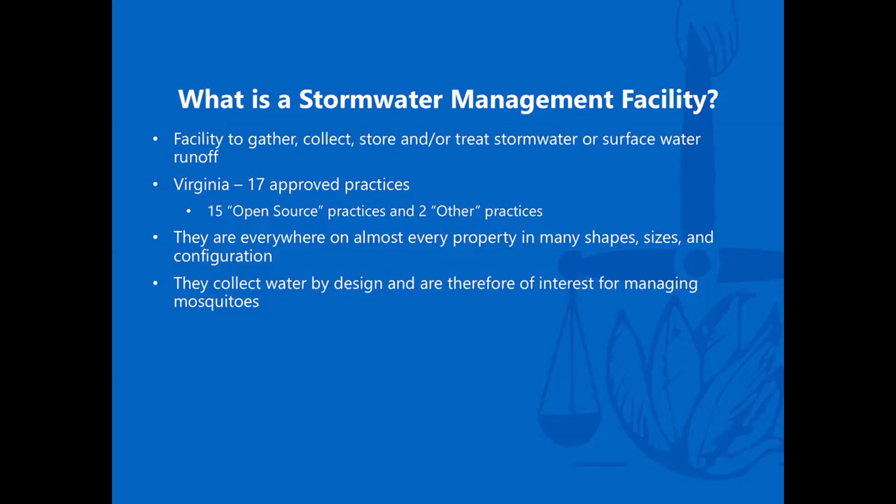By design, they're of concern for mosquito control, because their sole purpose is to, at a minimum, collect rainwater. Now, what happens to that rainwater after it's collected varies greatly on the facility and the practices of the individual jurisdiction that's managing those. But just in the sheer nature of what it's there to do, it's of concern to us.

Quick anatomy of it. This I just ripped right out of the Virginia Stormwater Manual. The top picture there would be a bird's eye view down on what you would consider a typical stormwater facility. Starting at the top, you would have the area where the water flows in. And then usually you'll have either a gabion basket or some sort of riprap to slow the water down or disrupt flow to some degree.

And then as it makes its way through the pond floor, it's spreading out, potentially forming into a pool of water, or there could be plantings in there. There could be designed wetlands. There's a number of different things. And then every facility will have a dam breast or an embankment through which a control structure and pipe control the flow of water that comes out.

And you can see that the bottom picture is sort of a side view of it. And it's that same sort of tiered and stepped thing. It's important to note that basically anywhere you see a flat surface, or structure such as riprap, or a designed pool, these are all places that, number one, water will naturally collect, and number two, you will have a natural point of failure, which is going to be a theme of this as we continue.

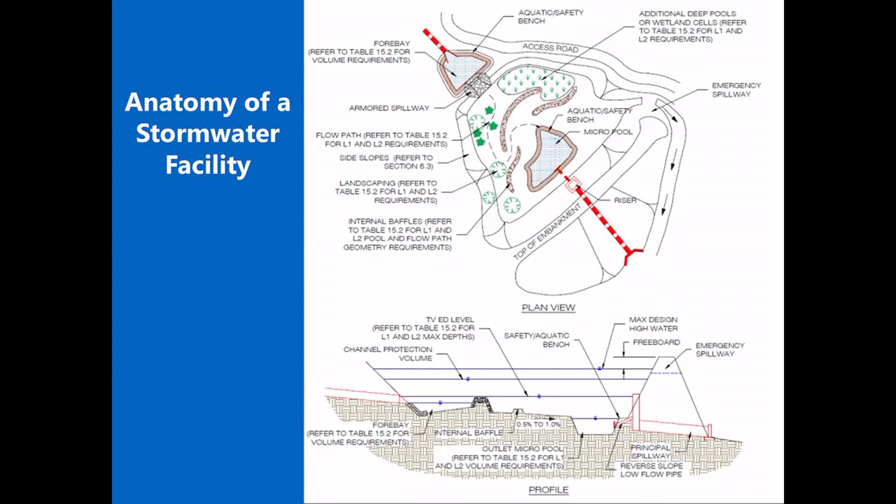And obviously they'll have fountains. Most of them will support fish populations. A lot of them are actually repurposed for recreational uses with HOAs. Generally, these are not issues for mosquito control, because we have a natural aquatic ecosystem that eventually takes over. And the mosquitoes tend to not want to use them, or they don't have the survivability in there because the water is not as transient.

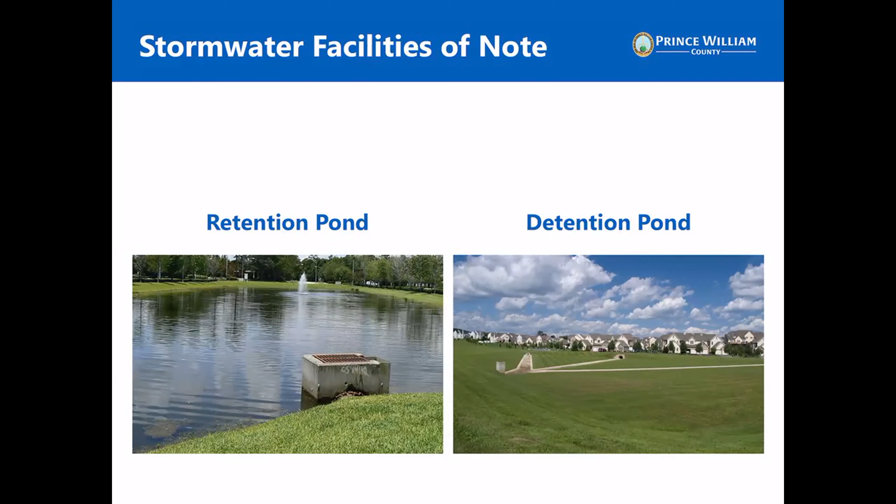On the right is a typical detention pond or extended detention pond or dry pond, depending on the language that you use. A lot of times they will have concrete channels like you see on this one. That's to help manage and maintain the flow of water through it during low rain events, and also to have the water flow directly into that little control structure to help move that water along, and avoid erosion as well, which is a major problem with stormwater management facilities.

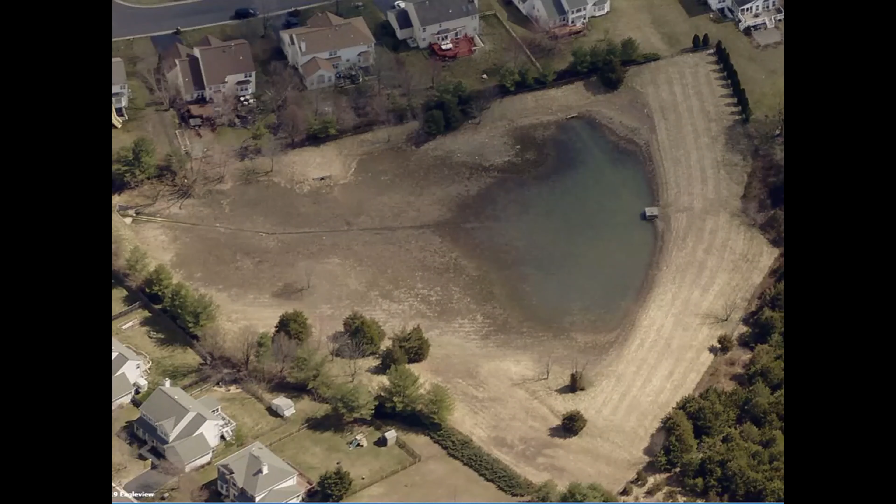Like I said, this would be a pretty typical type of design. This is probably a medium-sized facility, maybe on the large side for a dry detention pond. But this is pretty typically what we're looking at. Obviously not the volume of water, as it should be dry or dry within 72 hours. But it is a pretty typical shot of what we're looking at.

So stormwater management in Prince William County: the county has 2,203 separate stormwater management facilities. These are basically all wet, dry ponds or bioretention facilities that they need to maintain and inspect per their municipal separate storm sewer system permit, or MS4 permit. There's a lot more, but they just don't fall under the permit guidelines, and therefore we're not as concerned with them because they're either maintained privately or they're under a separate permit.

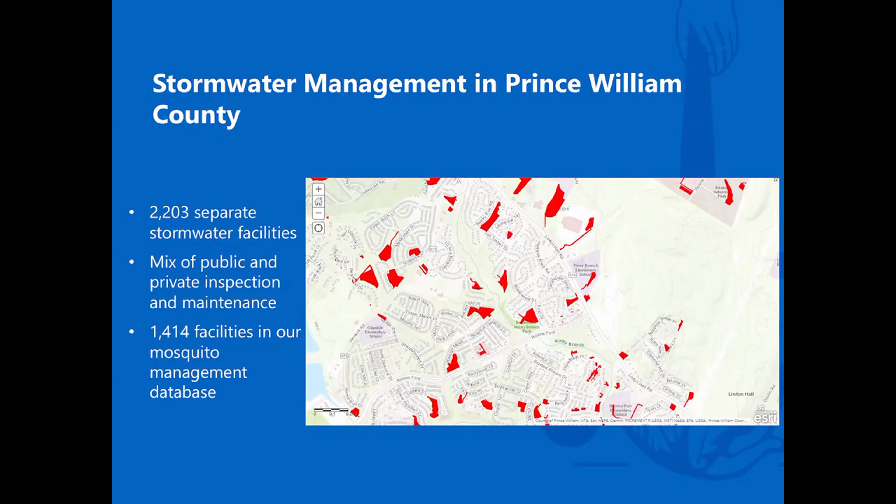This would be a typical neighborhood. There's quite a few facilities throughout there, kind of intermingled with the houses. So these are places where water's gathering and breeding mosquitoes, and it's literally in people's backyards. And there's a notion out there that stormwater management facilities don't breed mosquitoes, or they're being maintained, therefore they're not as much of an issue as, say, a woodland pool or a roadside ditch, and that's just not really the case. And a lot of times they're in worse shape than most people realize at a glance.

So we run an IPM-based mosquito management program. We are heavily focused on managing for larval mosquito populations through source reduction and larviciding. We really don't do much spraying. In fact, the last 2 years, we didn't do any truck-based adulticiding. We did a little bit with some twister backpacks, but we really haven't had the need. We really try to do things with larval management first.

In total, we have 2,302 mosquito sites in our system. 61% of those are stormwater facilities that I referenced in the last one. So 39% of our sites that we know to breed mosquitoes are things like woodland pools or tire piles, other artificial containers, junkyards, things like that. We do have quite a few woodland pools and old tire ruts and things like that.

We prioritize all our sites based on their inspection and larviciding history, and I'll get into that a little bit later. And we inspect and larvicide as much as we can based on a 30-day rotation. It really is our goal to inspect a site, larvicide it if we find mosquito larvae, and then get back to it within a 30-day period and try to maintain that throughout the summer months.

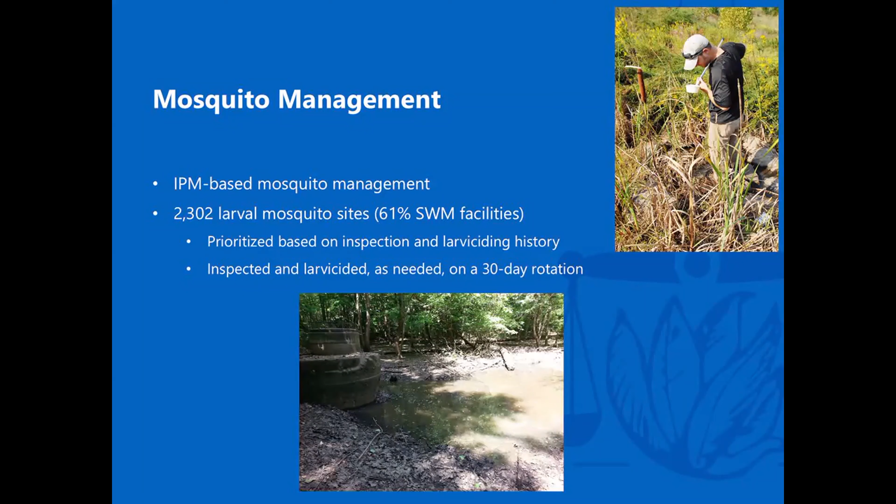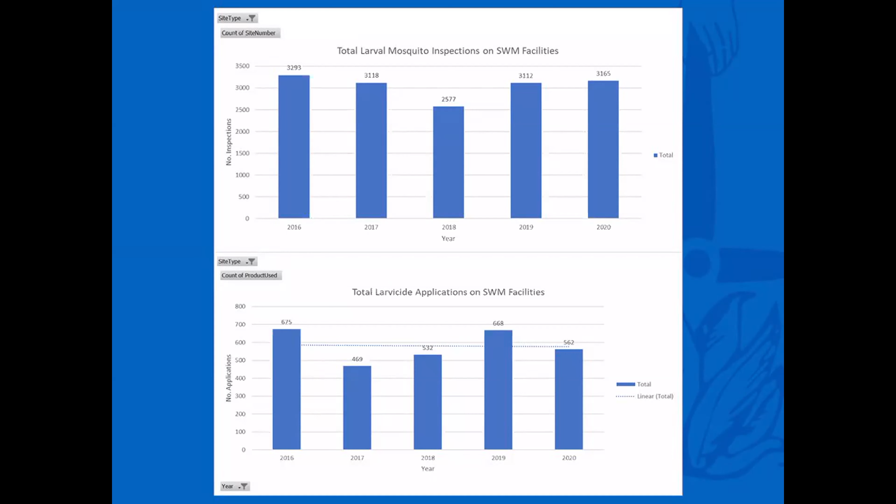It really doesn't seem to matter what you do or when you do it. You're pretty consistently always going to find water at stormwater facilities and mosquitoes in the water at stormwater management facilities on a regular basis. And I'll address that here on the next slide, which would be a comparison of our stormwater sites or non-stormwater sites.

You need to go to a pond 5 times to do 1 application, and that average is very stable. If you look at the lowest year we had was 22%, and the highest year we had was 26%. Or I'm sorry, the highest was 22, and the lowest was 19. So the average ending up at 20% is fairly consistent.

On the non-SWM side, the lowest was 26%, with the highest being almost 50%. Kind of the difference between the two is that third bullet point there, the application to inspection ratio, it doesn't change throughout the season for stormwater ponds. You're just as likely to find water and mosquitoes in the water in, say, April or May as you are in September or October, whereas non-SWM sites tend to be a little more seasonal in what's going on with them.

So a lot of times what happens is we base our priority of inspections on what we know the history to be, and non-SWM sites definitely have a higher priority earlier in the year and at the end of the year because of that. The other, that second bullet point there, the average application size, 180 square feet versus 333 square feet. Again, the size of non-stormwater sites is almost double for the average application size.

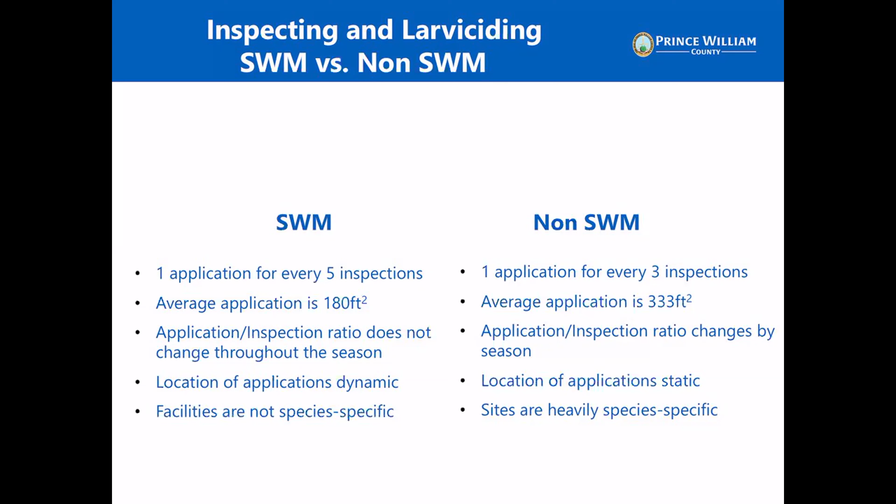And this is why the application areas are so small in stormwater ponds, because this sort of scenario pops up all the time, where you're coming in here and you're applying a very, very small amount of larvicide, but you get quite a few larvae packed into those little ponds, those little pools of water.

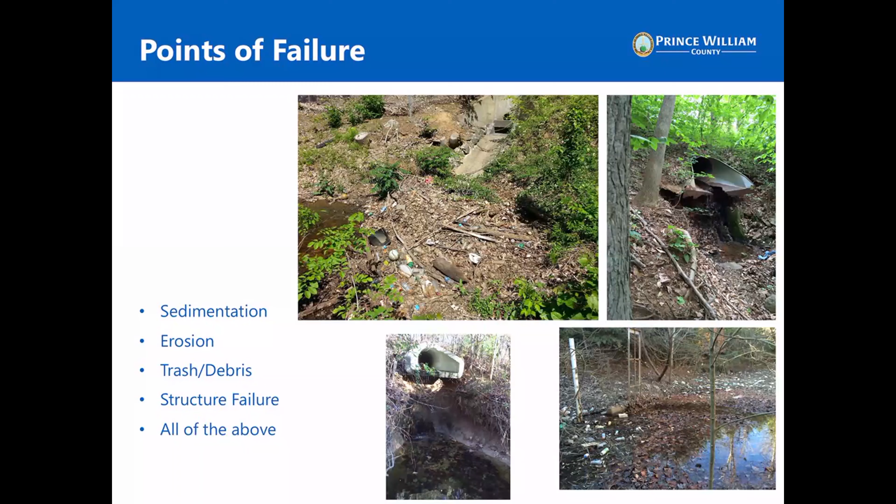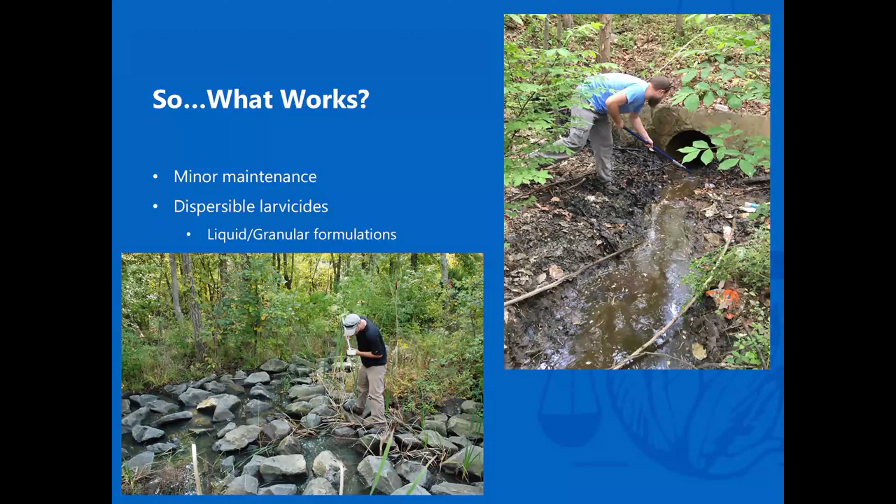So after all that, getting to the points of what does work and what doesn't work in stormwater ponds. The first thing I'll say is, if you're treating stormwater ponds the same as you would any other site, I would point you in the direction to look at them a little bit differently, because of the fact that they are maintained, or in some cases not maintained. It changes the dynamics of what you're doing, and you really need to get out and start looking at what's going on there. The other thing is, with stormwater ponds, you can actually do some maintenance and source reduction to help alleviate the problem.

So, there's me in the top right corner. I get my boots muddy every once in a while. And I'm just there with a potato hook, and I'm clearing out. That is actually an old facility. That's an old control structure, but I'm just cleaning out the debris to get the water moving.

And then the other thing is, all those studies that I referenced prior, and all the different formulations. What we found is that larvicides that you can disperse over an area, a liquid or a granular formulation, the active ingredient really doesn't matter as much, but because of the way the water flows in and out of ponds so frequently, these types of one-time applications tend to work the best. We've seen a lot of failures with other types of formulations that are for more appropriate habitats, where the water is a little more static.

We've actually been on a charge to increase our source reduction efforts. In 2016, source reduction was only 2% of our larval applications, and in 2020, this year, as we're wrapping up, it's actually just under 10%. So we've increased it 5 times over in 5 years, because if we're really running an integrated mosquito management program, our goal should be to reduce our pesticide use.

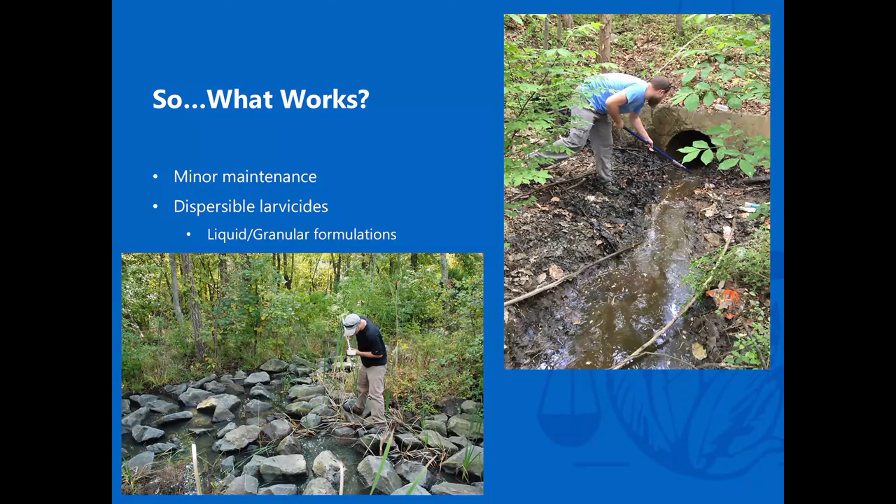And not long after we were doing that presentation, we did a study on it. What we found is they either get completely washed out, or they get covered over by sediment, because the sheer nature of a stormwater management facility is to let water settle, capture that sediment, and they just get buried. Sometimes they get buried in as little as 10 days, depending on the amount of rain that falls in that time frame. So it becomes an issue. You never really know if that's still working, and you could be going there dipping, finding mosquitoes, and you're not sure if that 150, 180 day briquette or extended release formula that you put down is working.

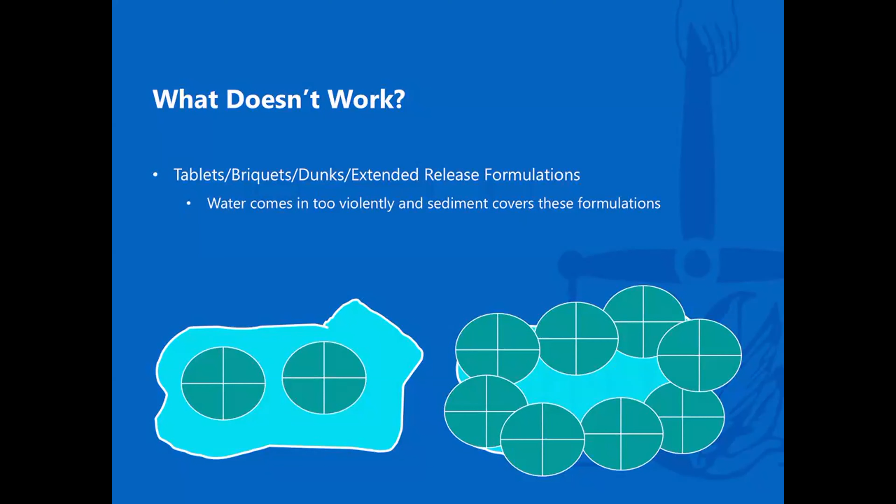These work way better in places like artificial containers and swimming pools, and we use a lot of them in those types of scenarios. They're just not appropriate for making those applications to the pond floor. So tips, tricks, and advice.

Really, it's a great idea to have a relationship with your MS4 administrator. So I have the benefit of our MS4 administrator actually being my supervisor, because we're located within Public Works and they are tasked with being the administrator. I have a really close relationship with him, and we can kind of hash out where we can put good stormwater management practices into place that also benefit our mosquito management strategy.

It's not cost effective to do so, because they don't need to do it for their regulatory issues. But it's a big problem for us, because we have to send somebody there to constantly be taking a look at it and applying larvicide. Like I said before, I would definitely inspect the whole facility.

Anywhere where there's structure or there is a designed area for the water to sit is one of those points of failure. And you can go out and inspect a facility, walk around the pond floor, week in, week out, and if you're not checking the pipes, you could be missing a lot of these smaller areas that account for a pretty large boost to your mosquito population. Don't shy away from using hand tools.

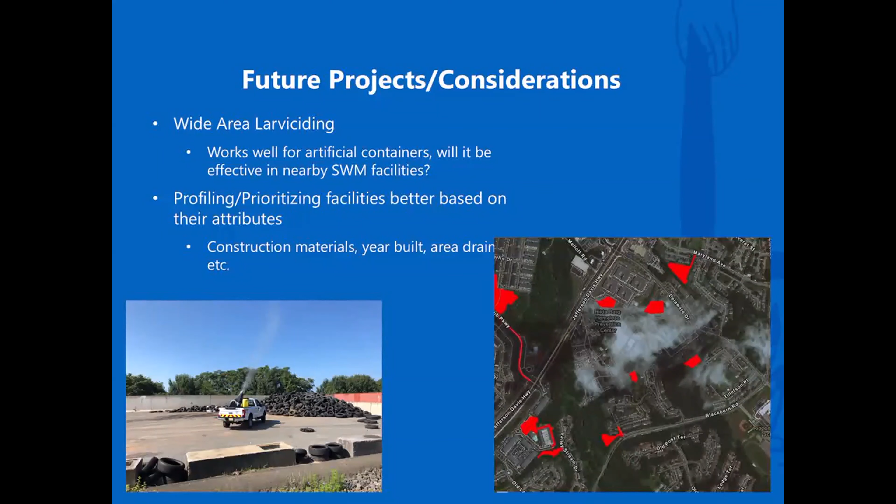So we're going to see if we can get a better idea of what those materials are, when it was built, what size of an area drains, because a half an inch of rain on a facility that only drains a half an acre is not that much, but a facility of similar size that drains maybe 2 or 3 times that area, it's a lot more water. And we know that there's a correlation there, but we haven't been able to pick it apart yet. So we're definitely going to look into that.